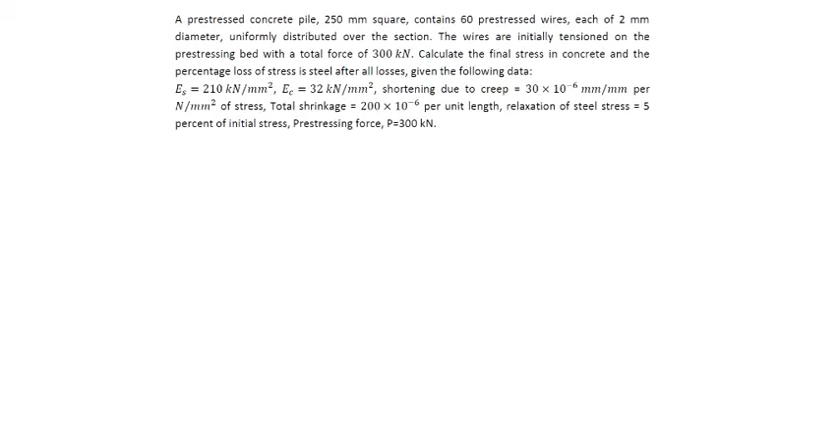Area of steel will be equal to, since there are 60 wires each of 2 mm diameter, so pi by 4 into 2 square, that will be equal to 188.4 mm square.

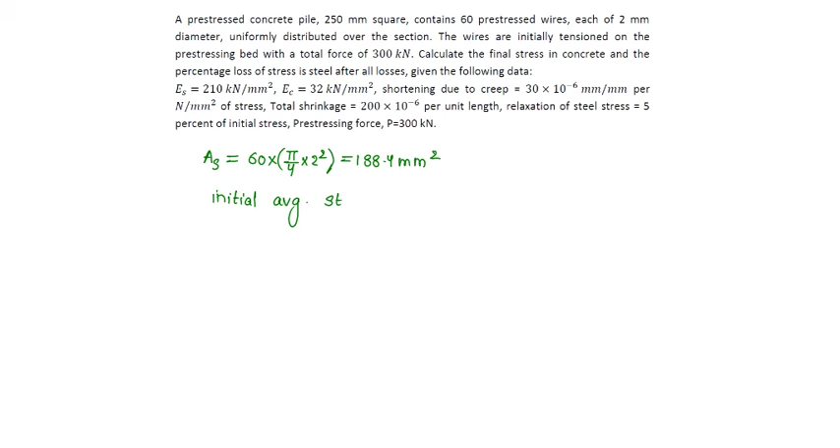Initial average stress in concrete will be equal to P by A. P is 300 into 10 power 3 to convert into Newton, by cross section area is 250 by 250 mm square, which is equal to 4.8 Newton per mm square.

Modular ratio alpha will be equal to ES by EC, which is equal to ES is 210 kilonewton per mm square by EC is 32 kilonewton per mm square, so that is 6.58.

Initial stress in steel wires will be equal to P by area of steel. P is 300 into 10 power 3 to convert into Newton, by area of steel is 188.4, so that will be equal to 1590 Newton per mm square.

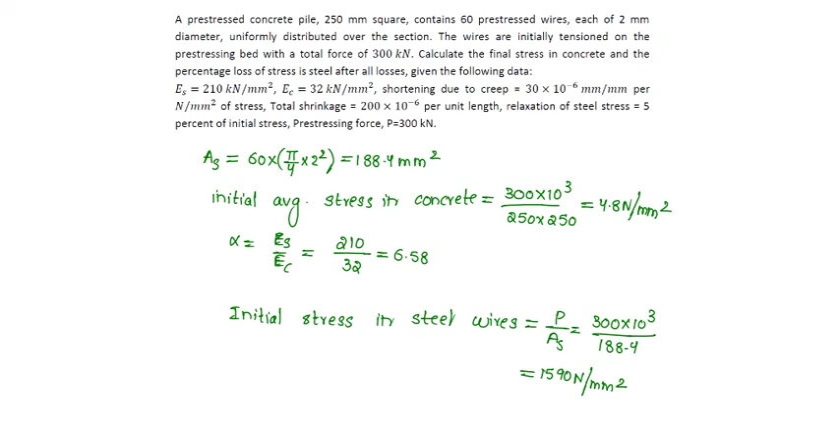Losses of stress. First is due to elastic deformation. That is equal to alpha into Fc. Alpha is 6.58 into Fc is 4.8 Newton per mm square. So this will be equal to 31.5 Newton per mm square.

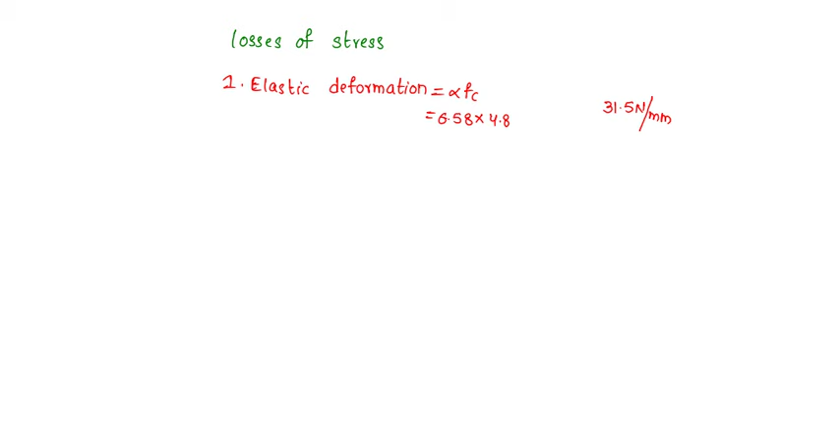Second is due to creep of concrete. That will be equal to shortening due to creep, that is creep coefficient. Shortening due to creep epsilon cc is given as 30 into 10 power minus 6 into Fc into Young's modulus of steel. Fc is 4.8 into Young's modulus of steel is 210 into 10 power 3 to convert into Newton per mm square. So that will be equal to 30 Newton per mm square.

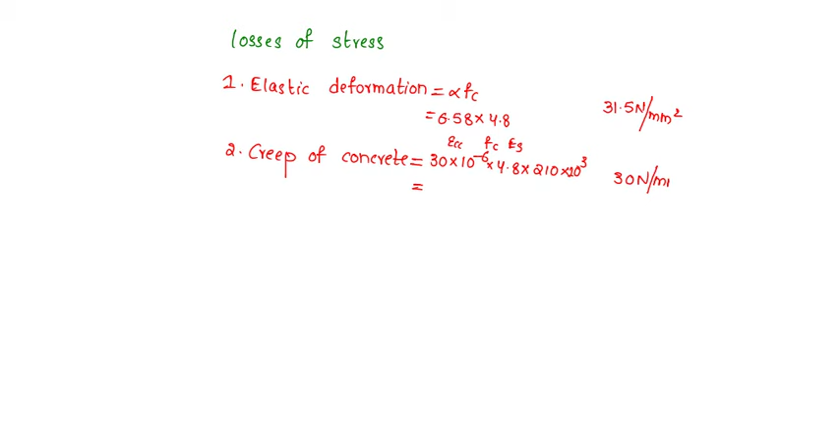Third loss is shrinkage of concrete, which is equal to shrinkage coefficient epsilon Cs into Young's modulus of steel, that is equal to 200 into 10 power minus 6 into Young's modulus of steel is 210 into 10 power 3 to convert into Newton per mm square. That will be equal to 42 Newton per mm square.

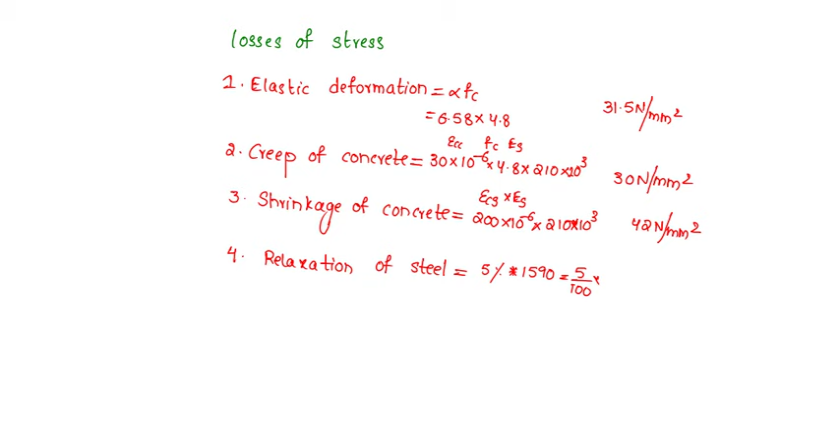Whereas stress due to relaxation of steel, which is equal to 5% of the initial stress, 5% of 1590, that is equal to 5 by 100 into 1590, which is 79.5 Newton per mm square. So the total loss is 183 Newton per mm square.

Now effective pre-stress is initial minus loss, that is 1590 minus loss is 183, which is 1407 Newton per mm square.

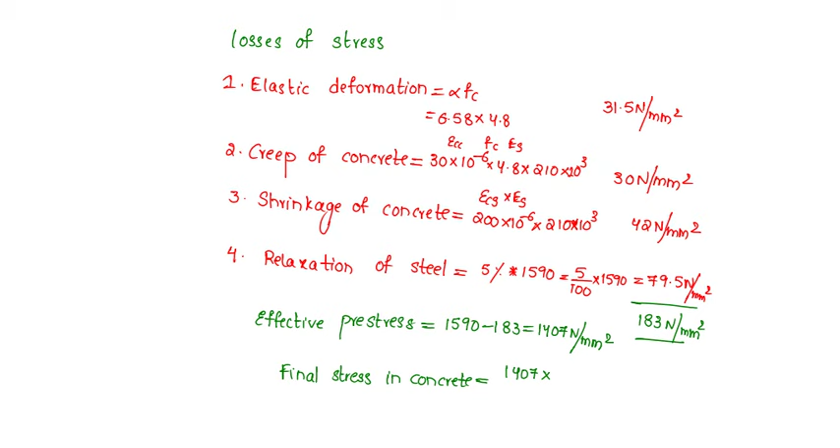Final stress in concrete will be force by area. Force is the effective pre-stress obtained into cross section area of steel, that is 188.4, will give us the force, by cross section area of concrete is 250 by 250, that will be equal to 4.26 Newton per mm square.

And the percentage loss will be equal to loss by initial, that is 183 by initial is 1590 into 100, which will be equal to 11.6%.